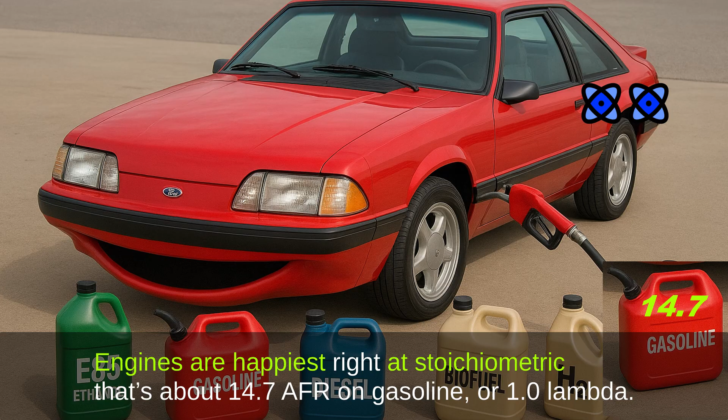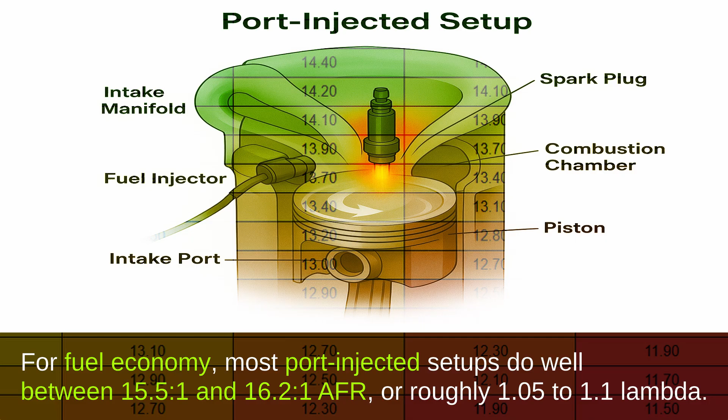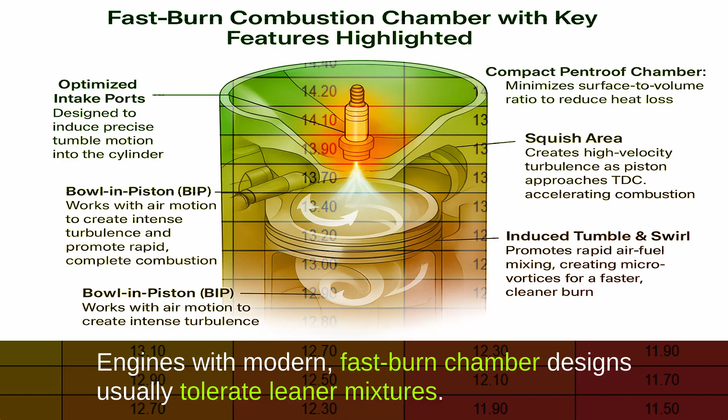Let's talk fueling. Engines are happiest right at stoichiometric, and that's about 14.7 AFR in gasoline or 1.0 lambda. For fuel economy, most port-injected setups do well between 15.5 to 1 and 16.2 to 1 AFR, or roughly 1.05 to 1.1 lambda. Engines with modern, fast-burn chamber designs can usually tolerate leaner mixtures. But throttle body setups generally need to stay at stoich or a little richer.

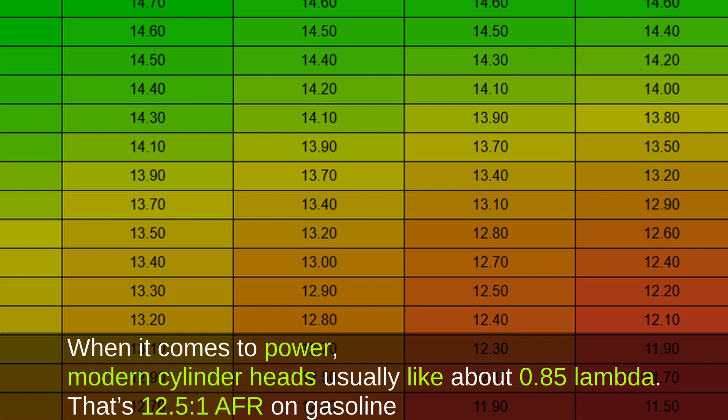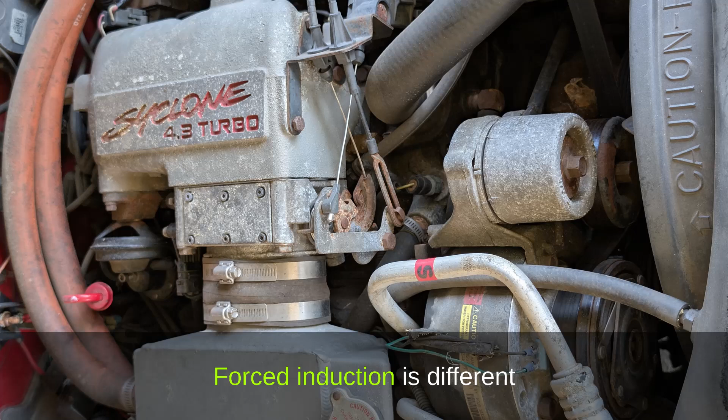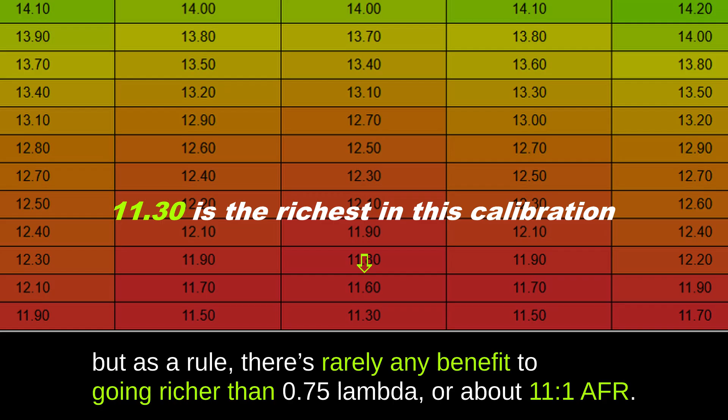When it comes to power, modern cylinder heads usually like about 0.85 lambda, and that's 12.5 AFR on gasoline. Older heads tend to want richer mixtures. Forced induction, now that's a little bit different, and you'll run richer mainly to avoid knock. The exact target depends on the combo you have set up. But as a rule, there's rarely any benefit to going richer than 0.75 lambda or about 11 AFR.

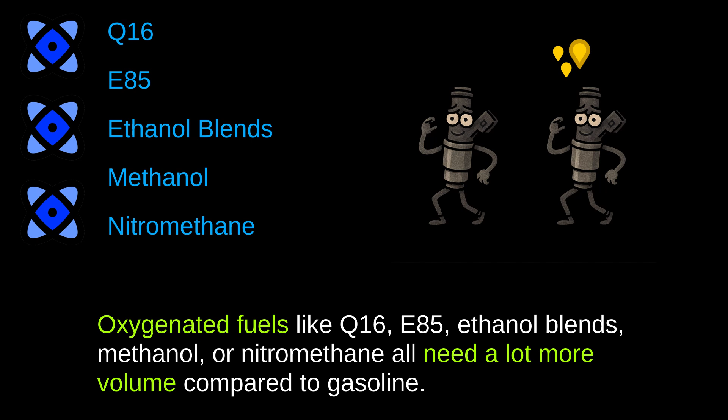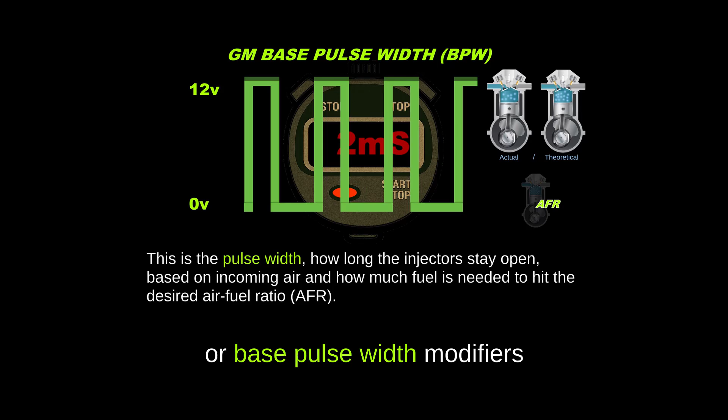Now, fuels matter. Oxygenated fuels like Q16, E85, ethanol blends, methanol, or nitromethane all need a lot more volume compared to gasoline. So if your system lets you pick stoichiometric values, use them. If not, it's usually better to correct with injector constants or base pulse width modifiers instead of fighting with MAF or VE tables.

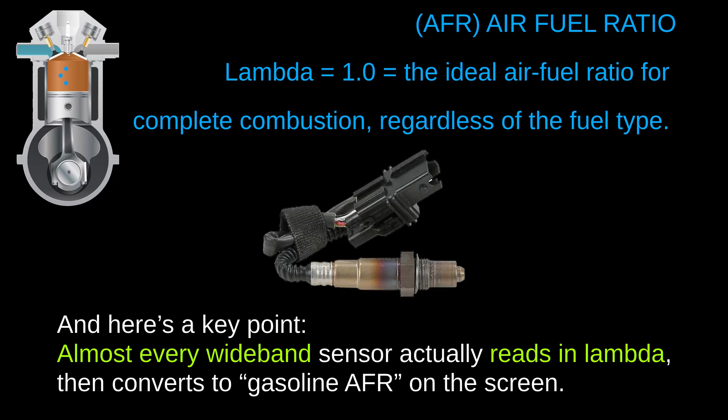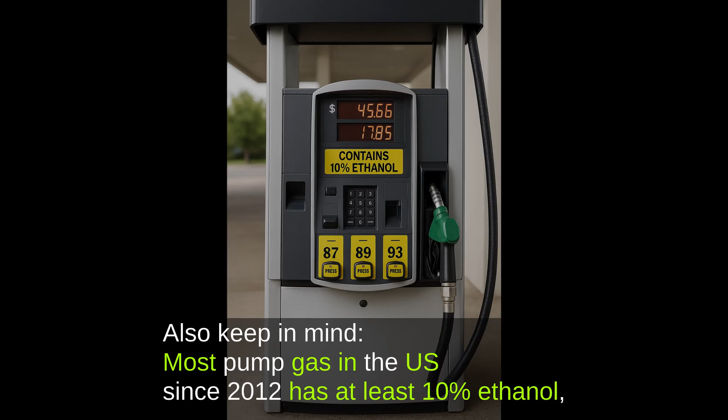And here's a key point. Almost every wideband sensor actually reads in lambda, then converts it to gasoline AFR on the screen. And that's fine if you're literally running gasoline. But if you're on E85, methanol, or something else, always think in terms of lambda first, then convert. For example, if you want 0.77 lambda on E85, that's going to show up as about 11.2 AFR on your gauge.

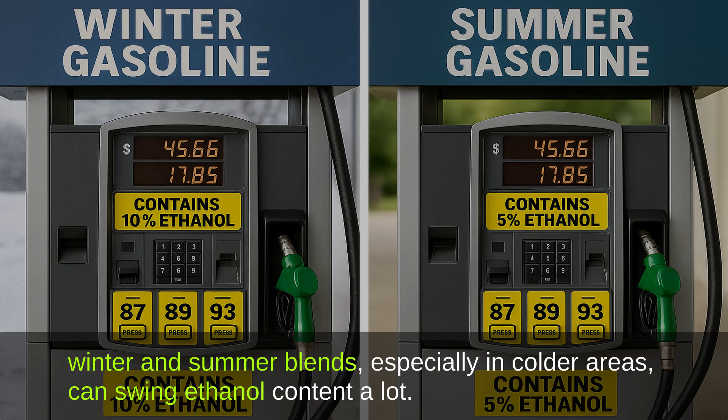Also keep in mind most pump gas in the US since 2012 has at least 10% ethanol, which puts true stoich closer to 14.1, not 14.7. On top of that, winter and summer blends, especially in colder areas, can swing ethanol content a lot. Even octane ratings by brands can vary.

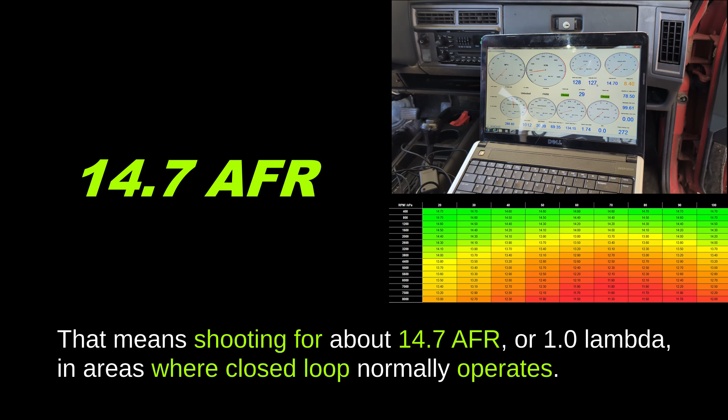If you're tuning with closed-loop O2 feedback disabled, make sure the tune is close enough so that when you turn closed-loop back on, the ECU doesn't have to make massive corrections. That means shooting for about 14.7 AFR, 1.0 lambda, in areas where closed loop normally operates.

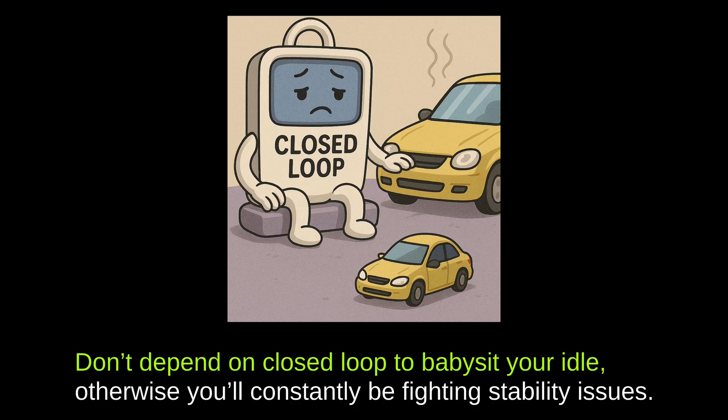And finally, get fueling around idle as smooth as possible in open loop. Don't depend on closed loop to babysit your idle, otherwise you'll constantly be fighting stability issues. Alright, that's it for fueling basics. Stay tuned for ignition.